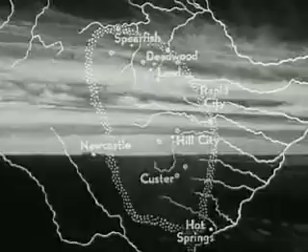Pathless wilderness, wild, rugged. That was the Black Hills of South Dakota in the early 1870s. A hardy frontier, far from the paths of civilization, where fortune beckoned with a glittering smile and life hung on the quickness of a trigger finger. There was gold in them thar hills, gold at Spring Creek, gold at Crook City, gold at Central City, gold on the mountains, in the rivers, and in the dark depths far below the surface of the earth.

For centuries uncounted, men have sought, fought, and died for gold, as they did in the Black Hills when the West was young. Brave men came from the north, the east, the south, the west. By the tens, the hundreds, the thousands, they tunneled the mountainside, they combed the gulches, they strained the rivers, creeks, and streams in their wild quest for gold.

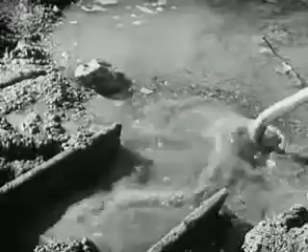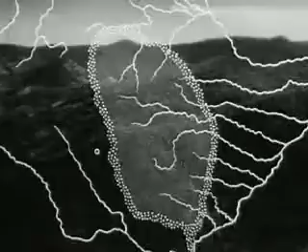But the romantic day of the placer miner was short-lived. No more could gold be washed from the coarse gravel of the creek beds. The placers were worked out. The bewhiskered pioneer with pick, shovel, and gold pan had served his day. And that day he served well, for he set the stage for a greater era and new industry destined to take its place with agriculture in South Dakota.

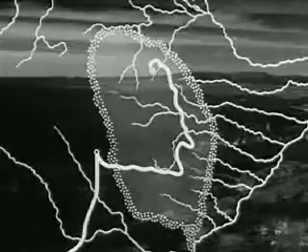Among the men who sought for gold in those daring days was Moses Manuel. He was interested in the scientific mining of hard rock formation, getting gold out of quartz ore so hard it could not be chipped by a miner's pick. Manuel and his party prospected the winter of 1875 without success. And then, on April 9, 1876, they discovered a ledge, an outcropping of ore that then was termed a lead.

They sank their discovery shaft in the side of a draw, and they called it Homestake Lead, and the mining camp which leaped to life took the name of Lead City. The original site of the Homestake mine has disappeared, and in its place has risen a thriving industry geared to modern progress. Today, Lead is still a mining camp, but a mining camp with 20th century trimmings. The Homestake mine is still there, for Lead is Homestake, and Homestake is Lead.

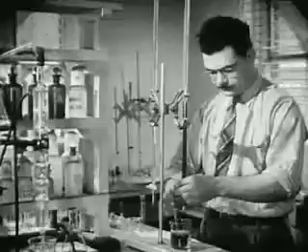But mining in the glamorous days of yore is a far cry from the complicated and scientific methods in use today. It takes more than a pick and shovel to get gold ore out of the ground now, and more than a gold pan to get the gold out of the ore. Would you like to mine for gold? Today, gold mining means raw materials, men and construction, combined with the science of chemistry and the wonders of modern engineering, all of which are necessary to make Homestake ore pay.

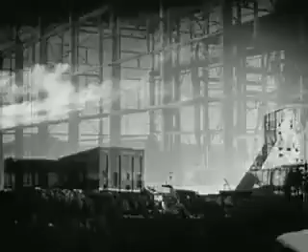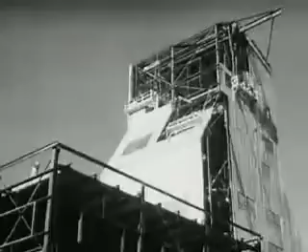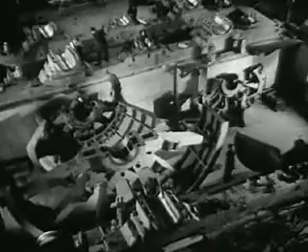New construction, which will take 2 years at a cost of about $3 million to complete. This complex steel structure, the head frame, rises from a man-made mountaintop plateau to reach nearly 150 feet skyward. In this massive building, made with more than 800,000 bricks, steel and concrete, giant equipment will control the hoisting and lowering of cages which carry men and materials.

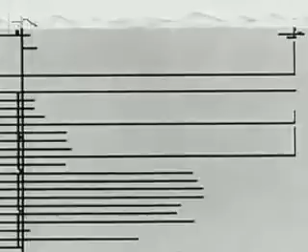This model of the Yates shaft shows what has to be done. The great construction work underground, blasted out of solid rock, but it isn't done from the top down. The shafts are cut from the bottom up. Tunnels, or drifts as the miners call them, are blasted from the solid rock to connect old workings with the exact location of the new shaft. Then the latter moves upward in many separate segments or links, which one by one are merged into a single vertical opening. Precision engineering makes sure the drifts meet the new shaft at the right places.

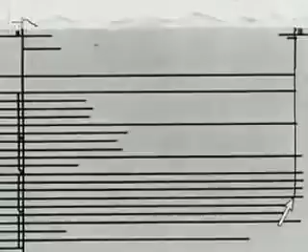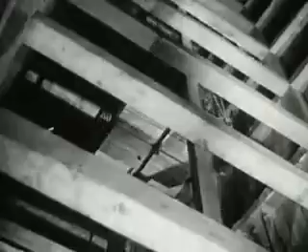But it's not as easy as that. Opening up a level and placing it in proper condition for mining requires many months of work. Drilling, blasting, ditching, hauling waste rock. More than 3.5 million feet of timber, or enough to build more than 200 5-room houses, go into the shaft. This drift leads to one of the ore bodies.

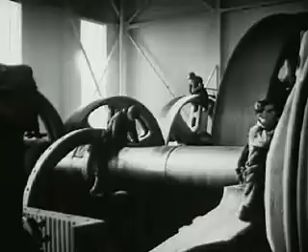2 years to finish the job. Hundreds of men at work under the ground, on the surface, high in the air. 2 years of work through the toughest kind of rock. Millions of feet of timber. Hundreds of tons of concrete and steel. Thousands upon hundreds of thousands of dollars for equipment, before one single ton of ore can be taken out. That's what gold mining is today. Where is that old-time pick and shovel now?

The new Yates plant, when complete, will look like this several million-dollar Ross plant, built in 1934 with a shaft where operations are now being conducted on many levels. The levels are spaced 100 feet apart down to 1,100 feet.

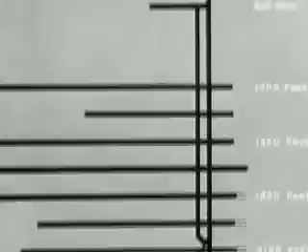Then 150 feet apart to the bottom of the mine. Now we're after gold. Down we go. 8-1. 8-1. That's the signal we heard a moment ago. The marvels of shortwave radio used for safety in the mining of gold ore.

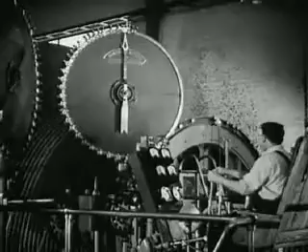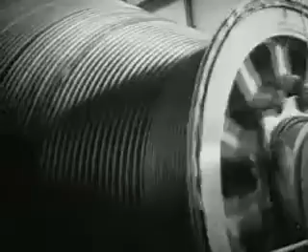These great and powerful drums, each holding more than a mile of stout steel hoisting cable in one layer, wind and unwind rapidly as the cages speed up and down the shaft, carrying their cargo to a safe haven. Vertical transportation, lowering human cargo over 4,000 feet into the earth, 4 times as deep as the height of the Empire State Building. Flashes of light are levels.

An indicating arm is geared with micrometer fineness and tells the operator exactly where the cage is at all times. 3,650 feet, 3,800 feet, 3,950 feet, 4,100 feet below the surface, at a speed more than 3 times as fast as a modern elevator, in perfect safety.

Over 2,000 men work for Homestake. The miners work in 2 shifts which are rotated, changes in hours for every man. At Homestake, safety is a first consideration. Helmets of light material tougher than steel, work lamps with a battery to keep them lighted for 8 hours, steel-toed shoes with spiked soles for safety.

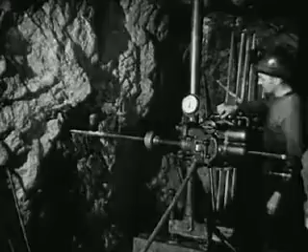But above all, it is the thorough understanding of their job and an unfailing observance of safety practices on the part of the men themselves that have brought the Homestake record to its remarkably low accident rate. Prospecting, shaft sinking, drifting, raising, cross-cutting, diamond drilling, all preliminary to actual mining of the ore. Here's the air-driven diamond drill outlining the gold-bearing rock.

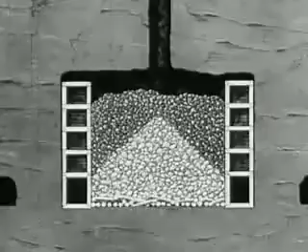Gold ore is mined by 2 methods: the shrinkage stope method without timber and the square set method with timber. These miners are climbing into a stope from which the ore is being removed by the shrinkage method. Shrinkage stope mining consists of breaking ore away from solid rock. As the roof of the opening or stope becomes higher, the miners use the broken ore as a platform on which to work. Loose rock hanging overhead is pried off with long steel bars. Miners call this barring down.

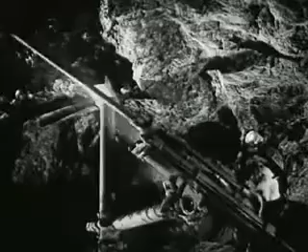Pneumatic drills bite deep into the tough, hard ore to make holes for blasting. 10 feet into solid rock. Every day, 3,000 steel drills go into the mine. Every day, 3,000 steel bits are taken out for sharpening.

Prying down loose rock, drilling holes deep into the ore, and loading the holes for blasting require an 8-hour working cycle. 3 million sticks of dynamite every year, 1 million blasting caps to set off 1 million blasts, for nearly 1.5 million tons of ore mined annually in the Homestake mine. The blasting is done at the end of the day. Out go the tools, and out go the men to a safe place far from the blast. They light the fuses, the smoke curls up. It's all over until another shift repeats the cycle.

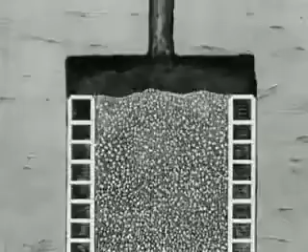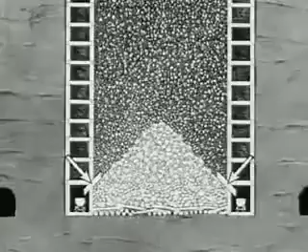When the shrinkage stope is mined up to a height of 125 feet, the chamber is filled with broken ore, which must be drawn through chutes into 1-ton cars. Strong timber planking and steel guards protect the loaders from flying ore. 1 ton of ore to a car, 20 cars to a train. 20 tons of solid ore and not a flake of gold in sight.

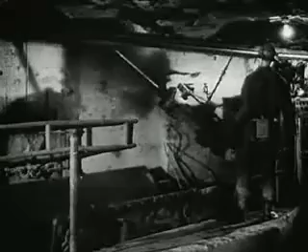Locomotives powered by electricity, locomotives powered by compressed air, all run on tracks from all points underground, run regularly on a complete railway system. 80 miles of steel track to carry equipment, materials, and gold ore.

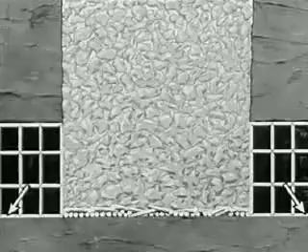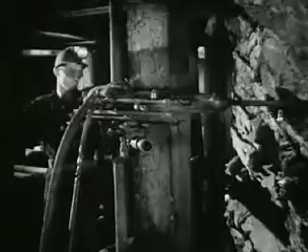Ore mined by the square set method consists of timbering to take out the ore which was left in place to support the roof and sidewalls during shrinkage stope mining. These men are working under the pillar you saw in the picture a moment ago. The process is the same here as in the shrinkage stope method. Drill, blast, and remove the ore. Water runs through a rifle drilled hole in the center of the drill steel. The water does 3 jobs: cools, lubricates, and prevents dust.

Down goes the ore to the loading level below, and what punishment that timber takes. It has to be strong to stand that pounding. 1 foot square, tough timber from the Black Hills. This model shows you what the mine actually looks like. A massive underground structure of sturdy timber. The higher up the miners drill and blast away, the farther down the ore falls. The miners go up and the ore comes down.

In this subterranean cavern are supplies ready for use. Timber for extending the square set structure. Tools, drills, and extra equipment. Standing by, on the job for the time it is needed. Air for power and air for help. Every minute of every day, 500,000 cubic feet of fresh air go into the mine, and 500,000 cubic feet come out. Clean, fresh air every minute of the day for every man underground.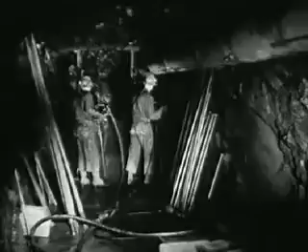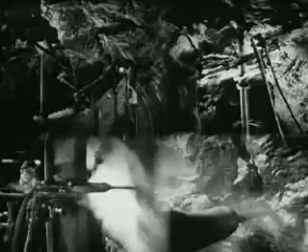These men are working in a heading, a dead end away from the main drifts and crosscuts of the mine, but they get plenty of clean air through canvas or galvanized iron ventilating pipes. 4,000 feet underground, but still there is air for the miners and air for power. But why air for power? To drive 500 air drills, 38 air locomotives, small ventilating fans, and other equipment.

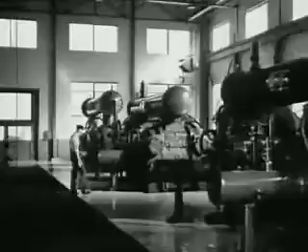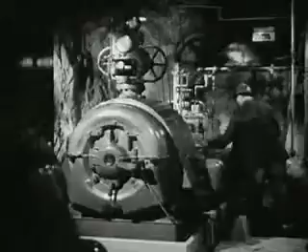Where does it all come from? Why, it comes from here. These great compressors running day and night furnish high-pressure air for many machines. Water for spraying to keep down the dust. Water from sand used in filling worked-out shrinkage stopes. Water from the earth. Water for the drills. 600 gallons of water pumped from the mine each minute, or enough for a city of 20,000 people. And it all has to go someplace.

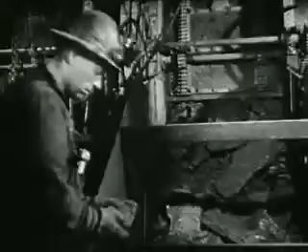But where's the gold? Let's look for it. That's funny, there's none to be seen. It's there all right, but in minute quantities. 4/10 of an ounce to a ton of rock.

The ore is hoisted at night. This skip is filled with 8 tons of ore, and there it goes. 25,000 pounds of ore and steel at 2,500 feet per minute. All of the new timber used in the mine is lowered through shafts. The old and broken timber is hoisted to the surface. More than 1,000 miners are lowered and hoisted through the shafts every day.

This heated tunnel leads directly from the shaft to a modern change house. The miners pass from the shaft to this room without going outside. Here, modern facilities guard against sudden changes in temperature. Safety precautions on the surface as well as underground.

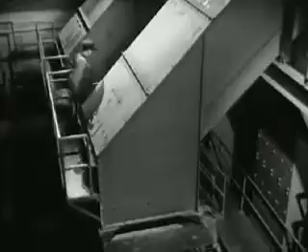Here's the gold ore again, and what a beating is in store for that rock. The ore is on its way now to the Gyratory Crusher, the first of a series of crushing machines. No one machine can do the job, so the Symons Crusher now breaks the rocks down to about 2-inch size, like this. It takes power and plenty of it. 2-inch pebbles from chunks of solid rock, but it's only the beginning.

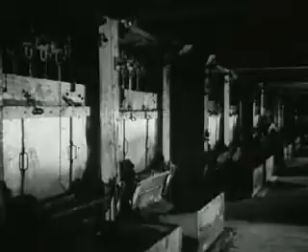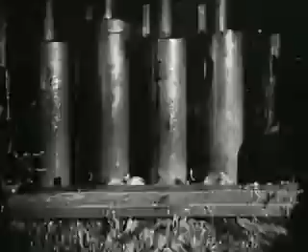From the crusher to the stamp mill, 180 stamps, each with a falling weight of 1,550 pounds. 300,000 tons of water are used every 24 hours in the process to reduce the ore to a fineness sufficient for the removal of the gold. The fall is from a height of 7 inches to break the ore fine enough to pass through a screen with 3/4-inch openings.

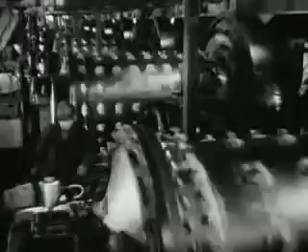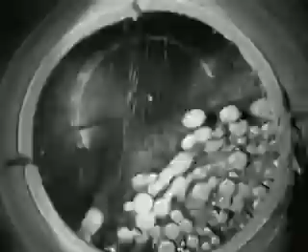These machines are called rod mills, revolving cylinders 12 feet long, 6 feet in diameter. Round and round, 10 of them breaking the ore to pieces smaller than a grain of wheat. Here's what's going on inside. 35,000 pounds of steel rods, hammering against 28,000 pounds of manganese steel plates, whirling around 17 times a minute. Tough going for the ore, and for the steel rods too. This is what a 10-foot rod looks like after going through the mill.

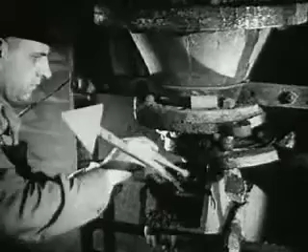In the rod mill, much of the ore is ground fine enough and requires no further grinding. And this machine, called a classifier, floats the fine ore out and sends it on its way. Periodically, a measured quantity of quicksilver is fed into the mills. This laboratory demonstration shows what takes place in the rod mill. Quicksilver and gold brought together form a grayish, putty-like mass called amalgam.

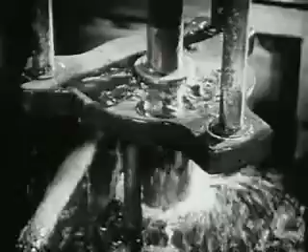The heavy amalgam settles to the bottom of the pulp to be captured on a copper plate which also has been treated with quicksilver. Yes, sir, there's the first sign of gold we've had, but you'd never know it to look at it. The amalgam is softened by the addition of more quicksilver and cleaned up in this hydraulic press. All ready now for a last change of face into gold.

These classifiers separate the sandy part of the ore from the overflowing slime. The overflowing slime is piped to another plant for special treatment. The sand is raked out of the classifiers to go on its way to the cyanide tanks. Lime is added to the sand pulp, another step in the chemical control of this complicated process. Water, water everywhere, and not a drop to drink. But what you see going into that tank is gold-bearing sand. The water just helps it along.

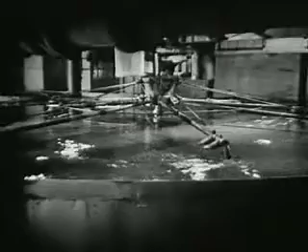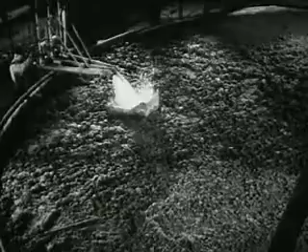There are 28 of these redwood tanks, each holding 700 tons of sand. 8 hours to fill a tank, and 20 to drain the water from it. Then the top must be raked. Why? To prevent caking, and then air is forced up through the sand to provide oxygen necessary in the cyanide treatment. The incoming cyanide solution goes on dissolving the particles of gold left in the sand after amalgamation and liquefies it.

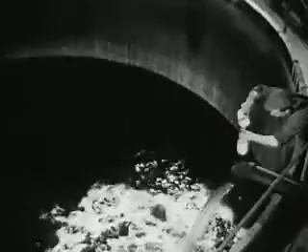It's hard to imagine gold being dissolved in a liquid like sugar in your coffee, but that is exactly what cyanide solution does. It turns gold into liquid. And there it is, liquid gold. Gold in solution. And the solution in that bottle is worth about 2 cents. But what about the sand? Man-made erosion, washing it away, returning it to the mine for filling the stopes from whence it came. This tank holds 200 tons of gold-bearing solution, gold taken from finely ground ore by the action of chemicals.

Remember the slime, that clay-like substance floated away in the classifiers? Here the last minute particles of gold are taken from it in these great presses. Here is a department that is highly important, the assay office. From the time the ore is mined, samples are taken, crushed and analyzed for necessary control of operations. Every step of the way the ore is tested. This is for control, to make sure the right procedure is followed all along the line.

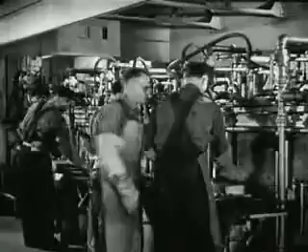There's the first piece of gold we've seen, and it weighs but a tiny fraction of an ounce. At last the gold is made. That is, if you can call the result of all the mining, grinding, and processing you have just seen making gold. This is the end for the small briquettes of amalgam and the precipitate, the melting pot. With heat, the quicksilver is separated from the amalgam, and the resulting crude bullion is taken out of the retorts.

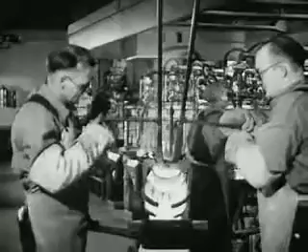In this furnace, the gold precipitate is refined into crude bullion by melting. The impurities are removed by the slag. Next, the bullion is remelted and further purified, ready to be cast into gold bars. This is the final result of the vast operations above and below. Less than a week ago, this gold was imprisoned in hard and tough rock, thousands of feet below the surface of the earth. What miracles of science and engineering it took to recover this gold from the ore.

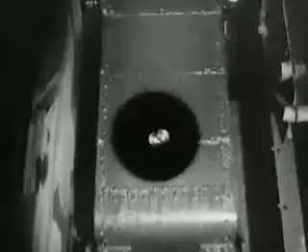4/10 of an ounce of bright yellow metal is what you see here, and it comes from 1 ton of ore. 1 ton of ore mined with modern equipment. 1 ton of ore hauled and hoisted to the surface. 1 ton of ore crushed and ground to a fine sand. 1 ton of ore through the rod mill for amalgamation, through the great tanks for cyanidation. The coordinated effort of hundreds of men above and below the surface of the earth. Complicated machinery, modern science, all working together so that 4/10 of an ounce of gold may be wrested from 1 ton of ore.

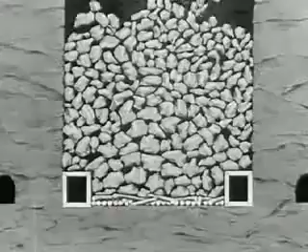But there are other things important to gold mining. Necessary, vast, basic, all blending to a common purpose. Sand filling, for example. Here hundreds of tons of ore have been taken out. Something must be put back to fill the open spaces. Combating the great rock pressures which otherwise cause surface caving, and to protect nearby underground workings, these openings must be tightly filled. But with what? With sand from the mill. After all the ore has been drawn from the shrinkage stopes, the stopes are filled with waste, barren rock. Then sand is sluiced into the broken rock for a tight fill.

The successful mining of marginal low-grade ores depends upon holding costs to an absolute minimum. Since 1931, Homestake taxes have increased at an alarming rate, and with them costs. Consequently, great blocks of ore are left in the mine, lost forever, because the cost of reopening the stopes in the future would be prohibitive. The lighter area is marginal ore. The black is ore. Increased costs cause shrinkage in the mineable ore, shorter life for Homestake, and inestimable loss to its employees and to the state of South Dakota.

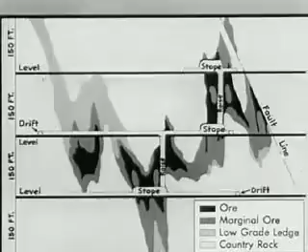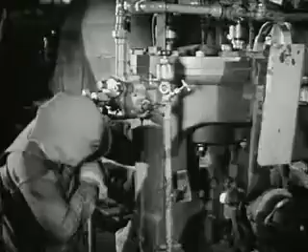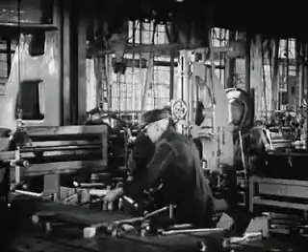Another engineering department has a highly important function in the Homestake mining operation: mechanical engineering. This department has to do with maintenance, service, and operation. Every year, this department makes and sharpens over 1.25 million pieces of drill steel for use in the mine. Special steels for 101 other uses are kept on hand at all times. Many kinds of special shop machinery are needed so that the mine and all other departments may receive prompt service and a supply of special parts and equipment.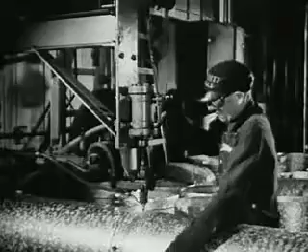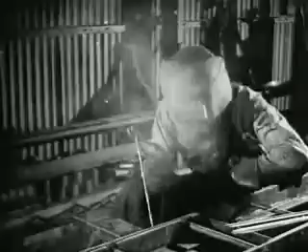Over 4,000 feet of ventilating pipe are made annually to provide healthful ventilation at all depths. The foundry produces over 2 million pounds of iron castings every year. Repair work such as this for the maintenance and operation of hoists, crushers, conveyors, air compressors, mine pumps, and boilers is constantly going on. Work as delicate as adjusting and balancing a fine scale or the repair of massive equipment weighing several tons, it's all in the day's work for these skilled and experienced Homestake mechanics.

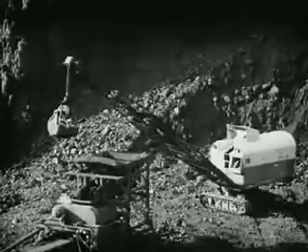Here at the Homestake coal deposit, the mining of coal goes on spring, summer, fall, and winter. Coal for Homestake light, power, and heat. Hundreds of tons of dirt are removed daily to expose the age-old bed of coal. And then, deep down into the bed of coal, nearly 100 feet, goes the charge of explosive. There go thousands of tons of coal, one of nature's greatest servants harnessed for the use of man.

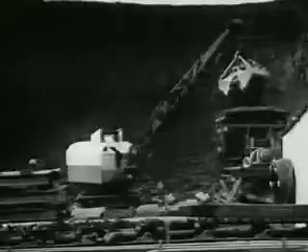Machinery for loading the coal onto endless conveyor belts, for transporting it to the tipple or sorting bin on the surface. Machinery for transforming it into power. Every day 350 tons of coal roll out of the mine and into the chutes. Coal for light, power, and heat. Coal for the Kirk power plant at Homestake. Coal to turn the wheels of industry.

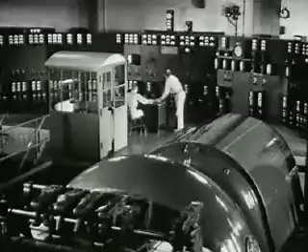Everything completely automatic, clean and efficient. Distilled water is used in the boilers to protect them against corrosion. Here it is made, 20,000 electrical horsepower, and distributed for heat, power, and light at Homestake.

Water trickling down from the Black Hills is piped over the mountains, through miles of tunnels, to the surge tanks where imprisoned air is freed from it, to drop nearly 700 feet below into one of Homestake's hydroelectric plants. 59 million kilowatts each year from hydro plants and steam, enough to light all of South Dakota's cities, all used in her great industry, the mining of gold.

New construction and improvements at Homestake require tens of thousands of sacks of cement, all of which come from South Dakota's Rapid City Cement Plant. Crushed rock in great quantities to keep pace with the company's needs. This is all supplied by the Lead City Crushing Plant.

Bricks, hundreds of thousands of them for Homestake and for South Dakota, are made by private enterprise at nearby Belle Fourche. South Dakota raw materials for new construction. South Dakota raw materials for a great South Dakota enterprise. More raw material in the towering forests. These giants of nature are the backbone of the mining industry. Timber.

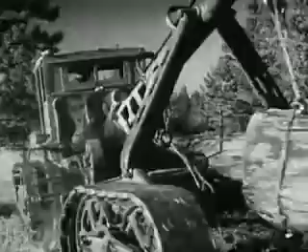Timber for the mines. Scientific methods are used in logging. No haphazard cutting nor waste in the great pine forests. Inspection before cutting. A weeding out process that gives the young trees a place in the sun. When the trees are stripped of their branches, they are loaded on trucks for transportation to the sawmill.

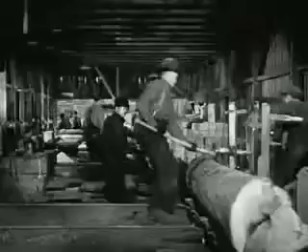No place for oxen or horses now. Big diesels do the work in good weather and bad. This big fellow is going to the mines. Out of the ground from a tiny seedling to a mighty giant of nature, back to the ground to hold it up as man's great ally in industry.

Timber for the mine, and a lot of it. What you see here is about 1 year's supply. All that lumber goes into the Homestake mine in a single year. You might wonder where it all comes from. It all comes from areas like this. But through selective cutting and reforestation, there is no denuding of the forests. Here is a typical reforested area.

Yes, there's plenty of timber and plenty of beauty in the Black Hills for the generations of today and the generations of tomorrow. Homestake logging meets high standards of conservation in cutting, thinning, reforestation, and fire prevention. Trained men protect its own holdings and cooperate in emergencies on the public domain.

Industry means science, raw materials, men. From the grizzled prospector of yesteryear to the great Homestake organization of today, a pioneer in the mining of gold, yes, but a pioneer in the development of a greater claim, the loyalty and contentment of its employees. Homestake pushes on.

This modern hospital, equipped with the finest of medical and surgical apparatus, is not only for the Homestake employee. Here, his family as well receives advice, counsel, treatment, and care from an expert staff of physicians and trained nurses at no expense. A liberal pension system adopted by Homestake in 1917 is an added comfort to those nearing the sunset of life.